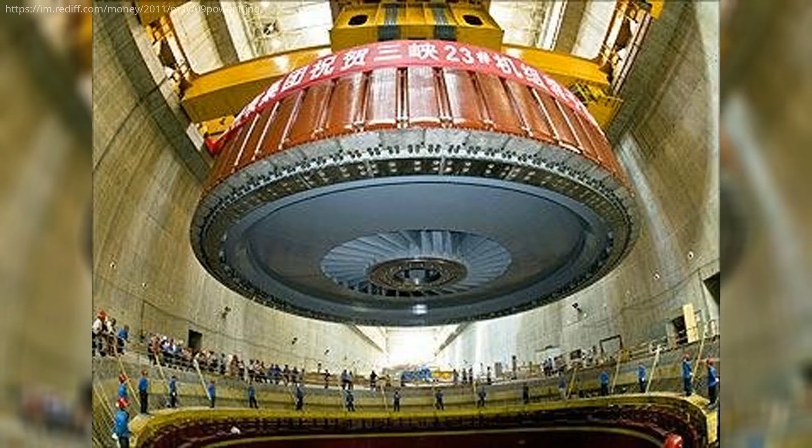It is 8:13 a.m. on August 17, 2009, inside Russia's Sayano Shushenskaya hydroelectric power station. Workers going about their standard morning routine suddenly witness the impossible. A solid steel spinning rotor weighing over 920 tons begins to rise up out of the floor entirely on its own. Before anyone can comprehend the sight or reach the emergency controls, a volcanic eruption of highly pressurized water blasts through the thick concrete. Just listen to the sheer destructive power of a high-pressure breach.

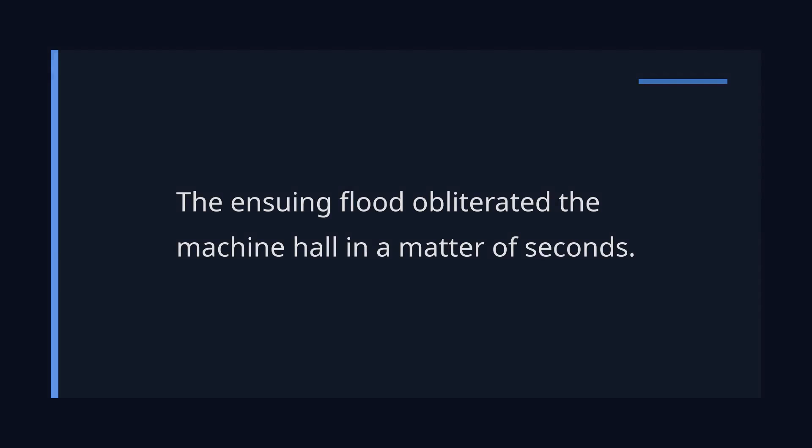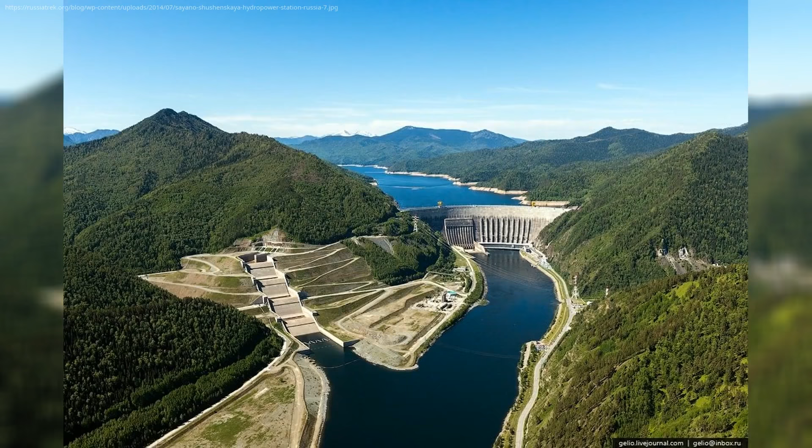The ensuing flood obliterated the machine hall in a matter of seconds. 75 people were killed, 9 out of 10 massive generating units were utterly destroyed, and 6,400 megawatts of electricity vanished instantly from the grid. Yet the most terrifying detail of this catastrophe is what did not happen. The enormous dam did not collapse, and there was no earthquake to rattle the foundation. The complete annihilation of Russia's largest power plant began in absolute secret, triggered by a microscopic flaw hiding deep inside the machine itself.

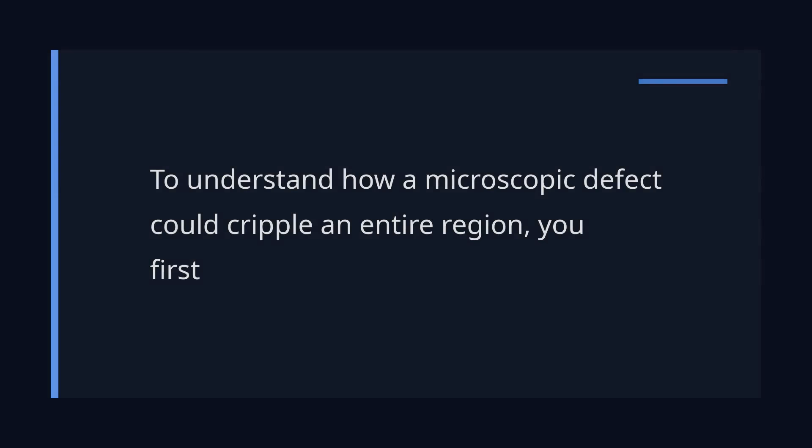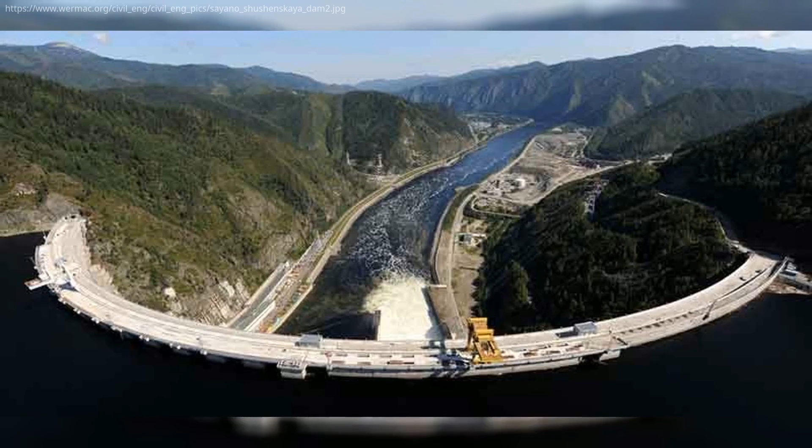To understand how a microscopic defect could cripple an entire region, you first have to grasp the sheer scale of Sayano Shushenskaya. Deep in the remote wilderness of Siberia, the Yenisei River carves a path through the Sayan Mountains. Blocking this massive waterway is a curved arch-gravity dam standing 242 meters tall. That is nearly the height of a 70-story skyscraper, constructed from over 9 million cubic meters of solid concrete. Its crest stretches over 1,000 meters across the river valley.

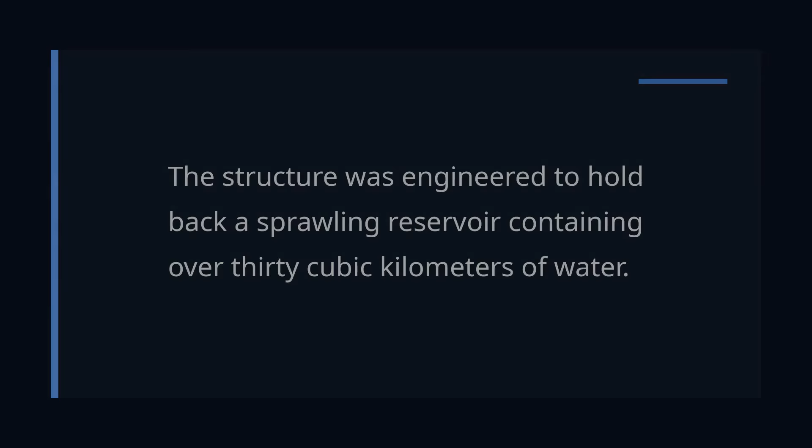The structure was engineered to hold back a sprawling reservoir containing over 30 cubic kilometers of water. When the spillways open to relieve the intense pressure, the raw kinetic energy is staggering. Just listen to the immense roar of the unleashed Siberian River.

Tucked away at the base of this colossal wall was the machine hall. It housed 10 titanic hydro-turbine generating units. When operating at peak efficiency, these machines produced a combined output of 6,400 megawatts. This made Sayano Shushenskaya the undisputed largest hydroelectric power station in Russia and a crown jewel of global engineering. However, this facility was not primarily designed to light up residential neighborhoods or nearby cities. It was built specifically as the beating heart of the Soviet and later Russian industrial machine.

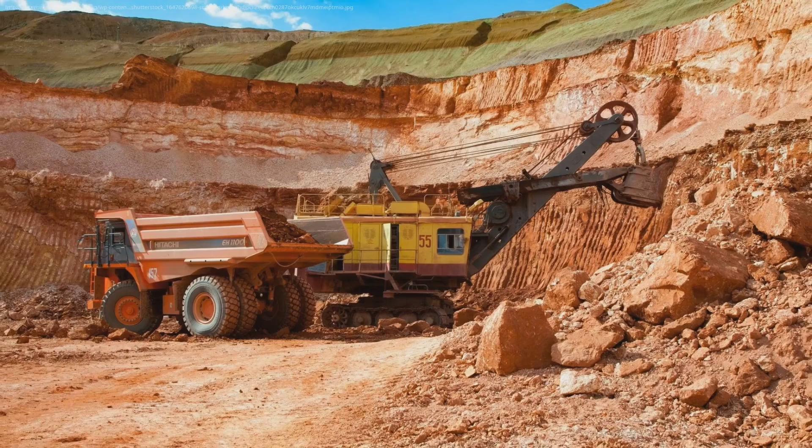The Siberian territory is dominated by massive aluminium smelters. Extracting pure aluminium from raw bauxite ore requires a continuous extreme supply of direct electrical current. The smelting process is so incredibly energy hungry that economists often describe exported aluminium as packaged electricity. Sayano Shushenskaya existed to feed these specific factories. Its turbines ran under constant heavy loads day and night to keep the molten metal flowing.

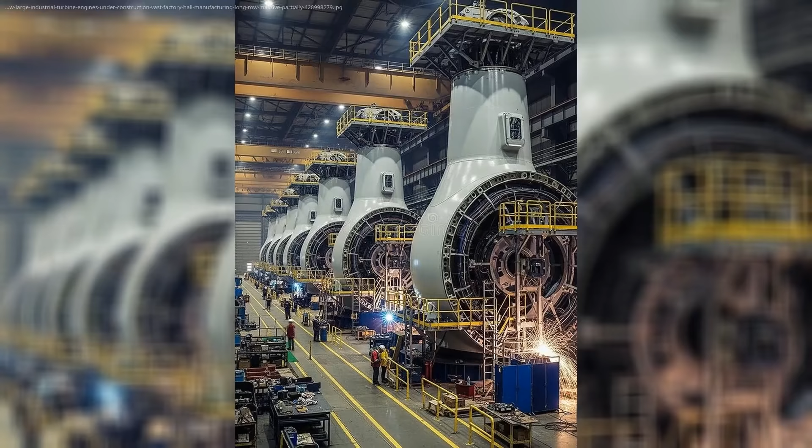Because of this deeply integrated relationship, the dam was an irreplaceable titan of the regional electrical grid. It supplied more than a quarter of the entire power demand for the vast Siberian territory. There were simply no secondary power stations capable of stepping in if this mega dam went offline. It carried the industrial economy on its back, meaning a sudden failure in the machine hall would instantly paralyze supply chains hundreds of miles away.

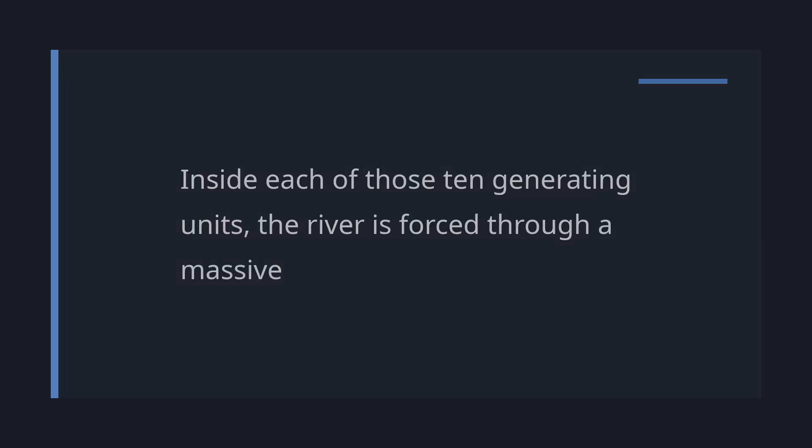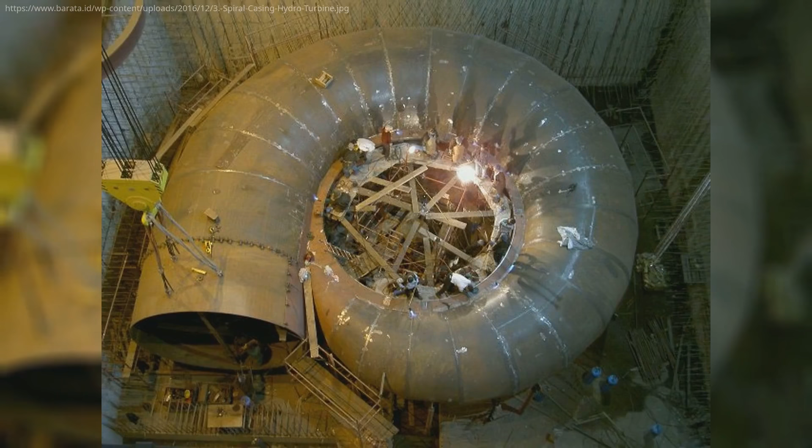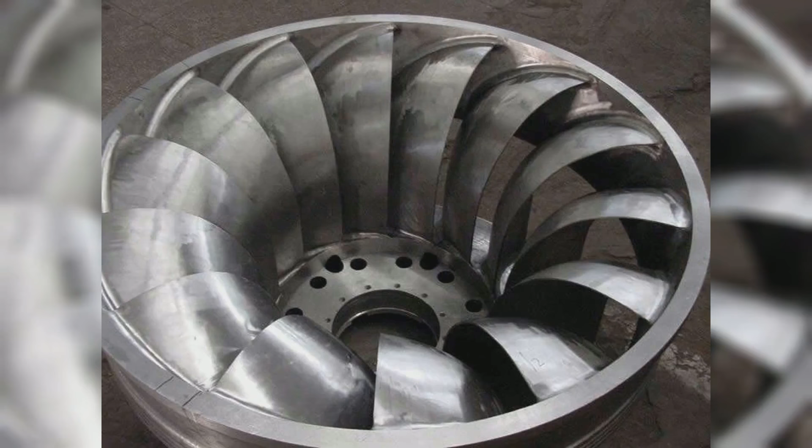Inside each of those 10 generating units, the river is forced through a massive steel pipe called a penstock. Falling from a height of over 200 meters, the water accelerates dramatically before slamming into a precisely engineered spiral casing. This structure acts like a giant snail shell, squeezing the rushing liquid and guiding it into a tight, high-speed vortex. At the very center of this whirlpool sits the turbine runner. This is a massive steel wheel fitted with intricately angled blades. As the vortex tightens, the water strikes these blades, transferring its raw kinetic energy and forcing the runner to spin at exactly 142.8 revolutions per minute.

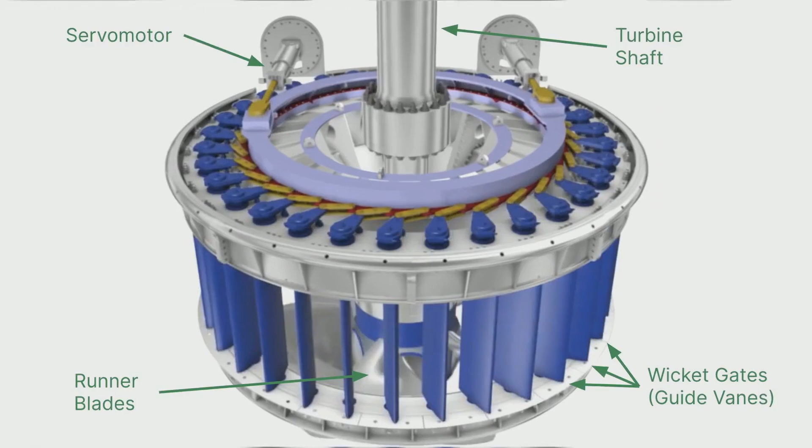Surviving inside this machine requires withstanding extreme, fluctuating, and often chaotic forces. Every single second, over 300 cubic meters of water blast through the turbine casing. That is roughly 300 metric tons of mass tearing through the system in the blink of an eye. This relentless flow creates a violent three-dimensional assault on the machinery. The sheer weight of the descending water pushes heavily downward, while centrifugal forces push violently outward against the metal walls. At the same time, the high-pressure flow rushing underneath the spinning blades creates a massive continuous upward thrust.

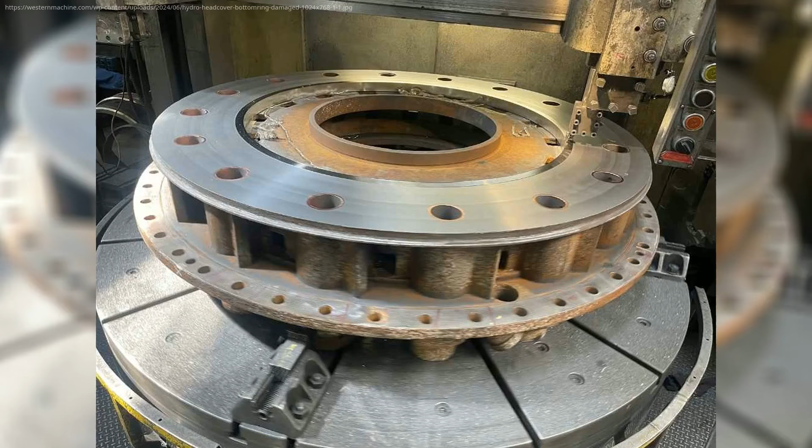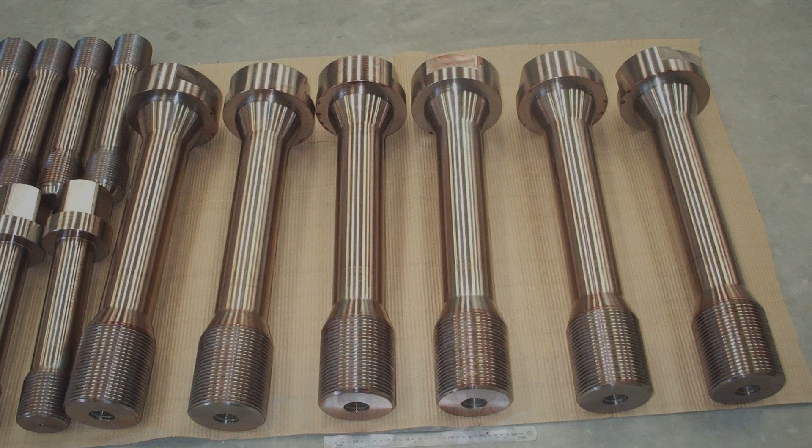To contain this relentless hydromechanical violence, the entire turbine assembly is capped by an enormous heavy steel head cover. You can think of this cover as a massive lid clamped onto an industrial pressure cooker. Keeping this heavy lid sealed tightly against the upward thrust of the river relies entirely on a single ring of 80 steel studs. Each of these threaded fasteners is roughly 8 centimeters thick, secured firmly into the foundation with a heavy-duty nut. These 80 steel fasteners represent the ultimate, non-negotiable line of defense for the entire facility. Below them lies the unyielding, crushing pressure of a sprawling Siberian reservoir desperate to find an exit.

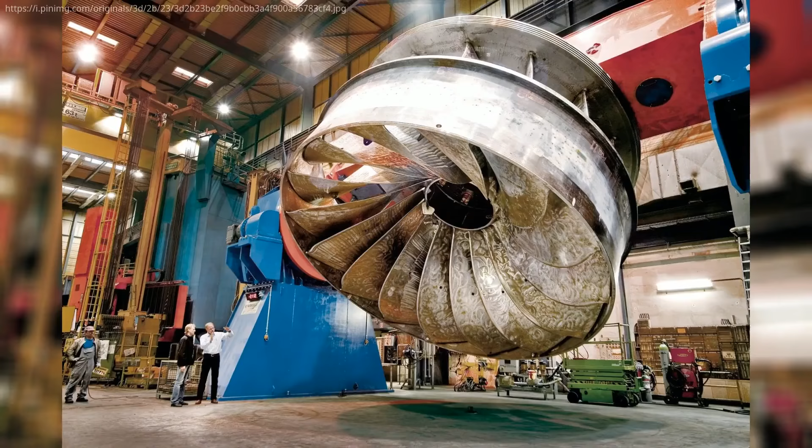Directly above them sits the dry, open floor of the machine hall where dozens of technicians and engineers work their daily shifts. There are no secondary containment domes, no backup seals, and no emergency blast shields. If those 80 specific studs stretch, crack, or shear off, the pressure boundary vanishes. There would be absolutely nothing left to stop the full force of the Yenisei River from bypassing the turbine runner entirely and erupting straight upward into the powerhouse.

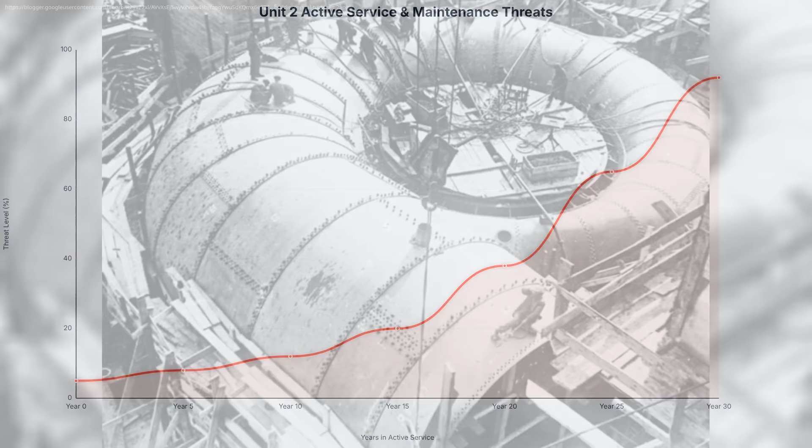Unit 2 had been spinning inside the Sayano Shushenskaya dam for nearly 30 years. But the age of the heavy steel machinery was not the primary problem. The real threat was how the unit was operated and maintained. In early 2009, Unit 2 underwent a scheduled modernization. Over the decades, relentless water pressure and cavitation had slowly carved deep pits into the steel turbine blades.

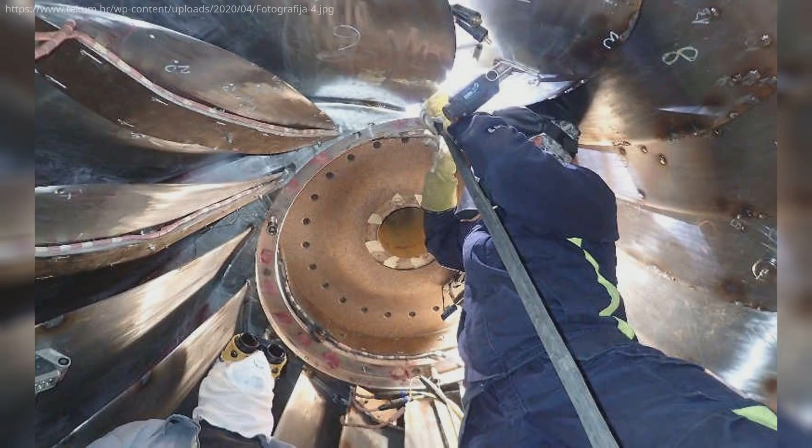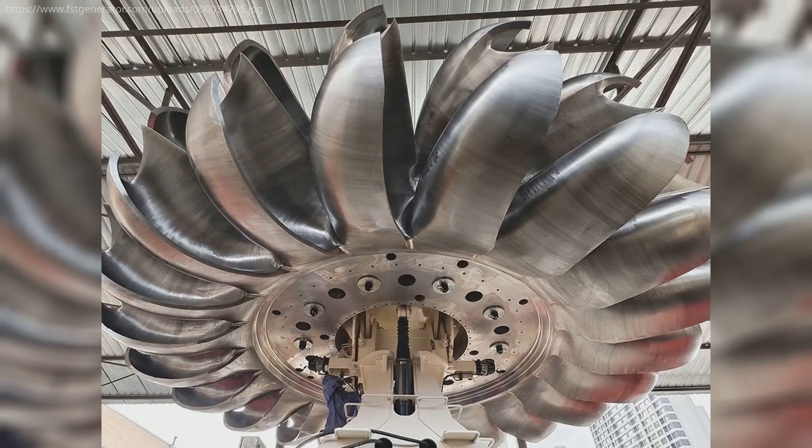Technicians welded these cavities to restore the smooth surfaces, but they made a critical engineering error. After adding asymmetrical amounts of new metal to the blades, they failed to properly rebalance the massive runner. It was exactly like putting a patch on a highway vehicle's tyre without balancing the wheel first, only this involved a rotating mass weighing hundreds of metric tons.

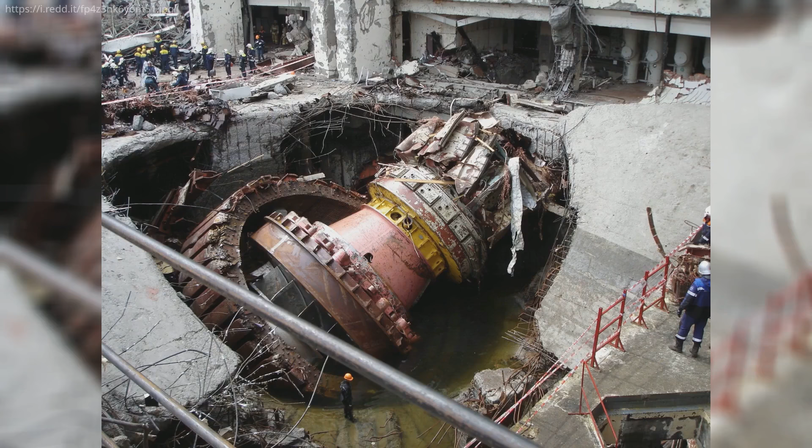When Unit 2 was brought back online, the consequences of this poor maintenance became immediately obvious. The uneven weight distribution caused the entire turbine shaft to wobble. Over the next few months, bearing vibrations steadily increased as the imbalance took its toll. By the summer, the heavy shaft was shifting laterally by 0.84 millimeters.

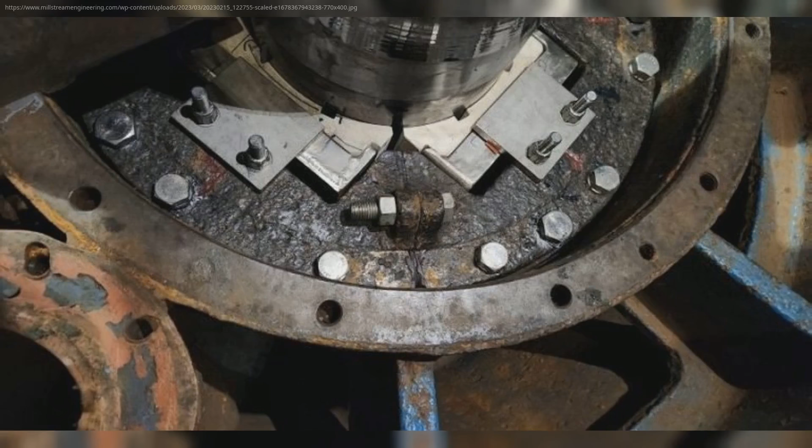While less than a single millimeter might sound microscopic, for a machine of this sheer size spinning at 142.8 revolutions per minute, it was a massive and highly destructive amount of physical movement. Every single rotation forcefully hammered away at the internal guide bearings and surrounding structures.

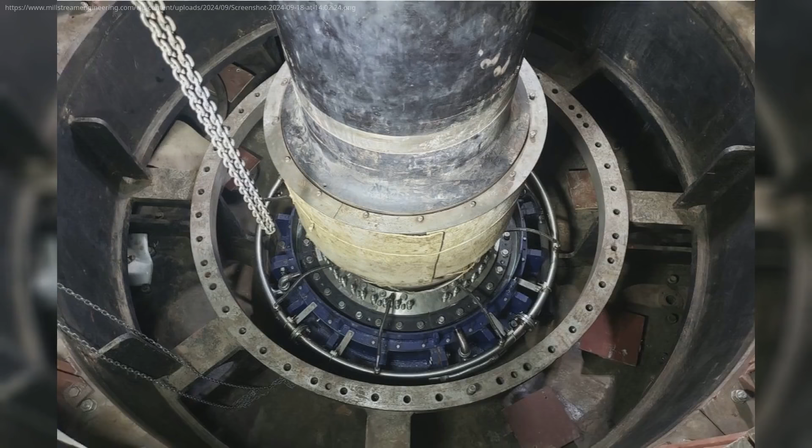Making matters much worse was the fundamentally counterintuitive nature of Francis turbines. You might expect a massive hydroelectric machine to shake the most when pushed to its absolute maximum output, but these specific turbines actually run incredibly smoothly at full power. The true danger lies in an unfavourable intermediate power band.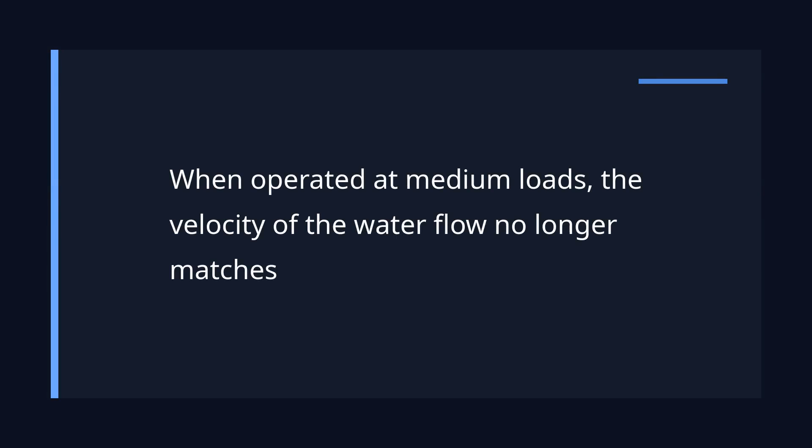When operated at medium loads, the velocity of the water flow no longer matches the fixed angle of the spinning blades. The rushing river physically separates from the steel surfaces, creating violent pressure pulses and chaotic vortexes beneath the runner. For months, grid operators repeatedly forced Unit 2 into this exact unfavourable zone to regulate the regional power supply, drastically compounding the severe vibrations actively tearing at its foundation.

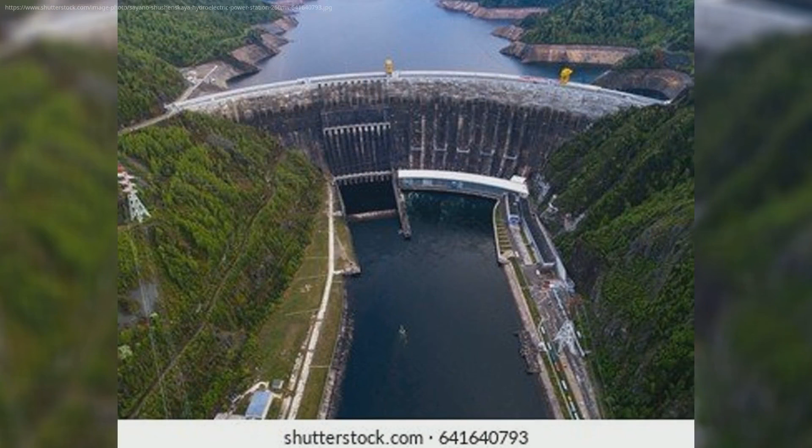To understand why this regulation was so destructive, you have to look at how grid balancing actually works. An electrical grid requires power generation to perfectly match consumer demand at every second of the day. As millions of people turn appliances on and off, power stations must constantly change their electrical output. For a hydroelectric plant, this means continuously adjusting the volume of water flowing through the penstocks, an action that inevitably forces the turbines to pass through their unstable dead zones as they transition between high and low power.

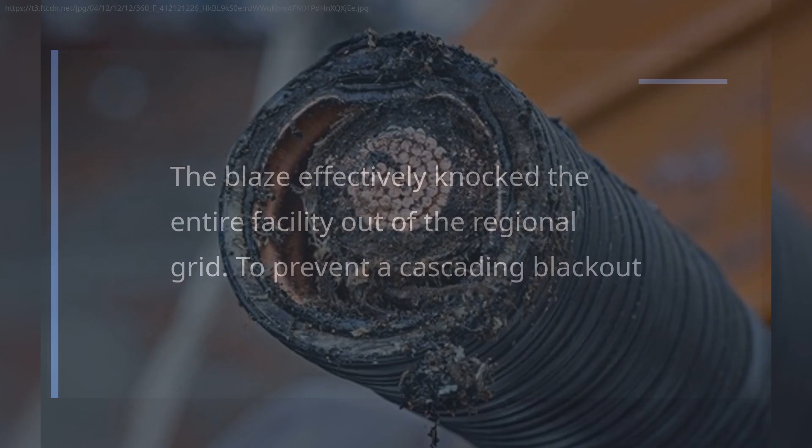This routine wear and tear escalated into a localized crisis on August 16, 2009. A fire broke out at the nearby Bratskaya hydroelectric power station, severing its vital communication and control cables. The blaze effectively knocked the entire facility out of the regional grid. To prevent a cascading blackout across Siberia, Sayano Shushenskaya was immediately ordered to take over Bratskaya's network regulation duties.

The plant's automated control system designated Unit 2 as the primary regulating turbine. Overnight and into the early morning hours of August 17th, the machine's electrical output was aggressively manipulated. As the regional grid demanded more or less power, the system relentlessly chased those rapidly changing requirements. Unit 2's load rose and dropped sharply, over and over again. With every single shift in power, the software dragged Unit 2 straight through its dangerous intermediate power band.

The turbine repeatedly entered its unstable hydraulic range, where rushing water physically separated from the steel blades and created chaotic pressure vortexes. Already crippled by a severely unbalanced rotor and degraded bearings, the heavy machine was subjected to violent pulsing stress, hammering its weakened internal components toward a catastrophic mechanical failure.

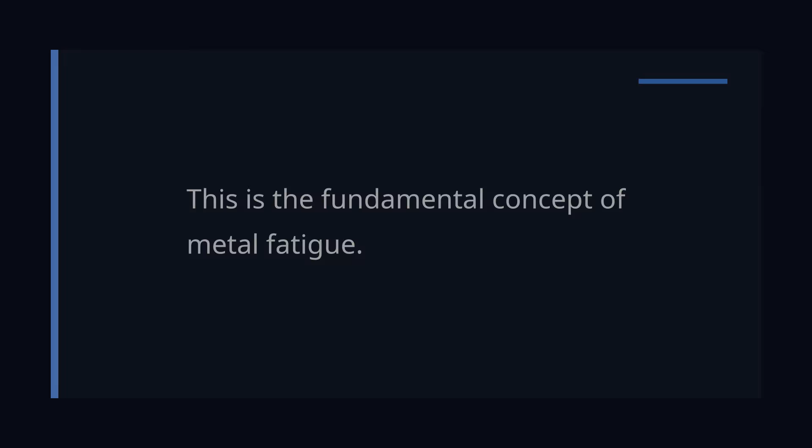If you want to break a metal paperclip, you do not try to pull it apart with one massive tug. Instead, you bend the wire back and forth over and over again until the internal structure degrades and snaps. This is the fundamental concept of metal fatigue. A heavy industrial component will rarely break from a single heavy load.

However, if you subject that same solid metal to millions of smaller, repetitive stresses, the atomic bonds will slowly begin to slip, forming microscopic cracks that grow wider with every cycle. Inside Unit 2, this relentless bending effect was focused directly on the enormous steel studs bolting the turbine cover down to the plant foundation.

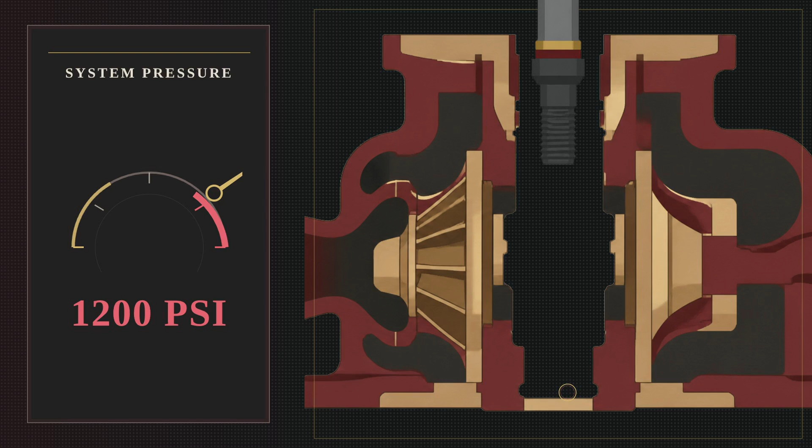These heavy fasteners were tasked with keeping the massive cover locked in place against the immense upward pressure of the river. But every time the control software dragged the turbine through its unstable zone, chaotic water vortexes violently shoved the entire assembly upward, physically stretching the steel studs. When the pressure dropped seconds later, the studs slammed back down. This continuous loading and unloading cycle was heavily amplified by the extreme vibrations radiating from the unbalanced rotor.

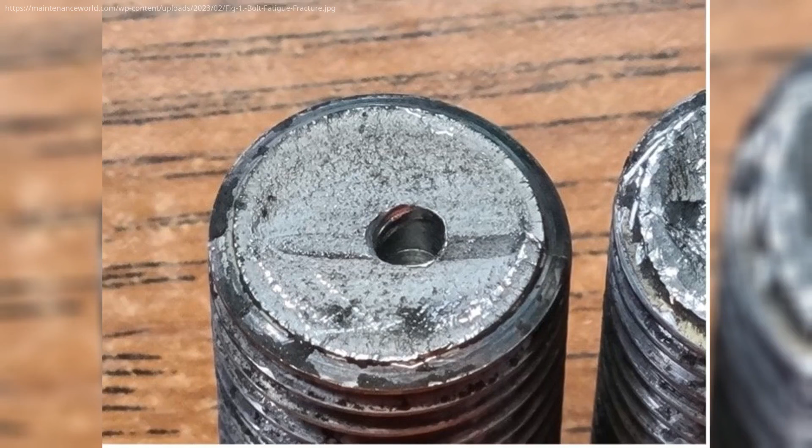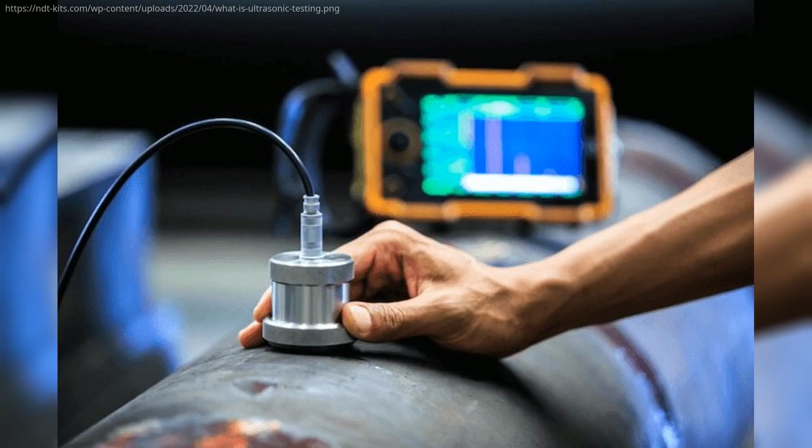The horrifying scale of this microscopic death was only revealed during the post-disaster investigation. When forensic engineers examined the ruined turbine pit, they recovered 49 of the heavy steel studs that had originally secured Unit 2. The laboratory results were staggering. 41 of those recovered studs showed clear evidence of extensive fatigue cracking. Even more terrifying, the cross-sectional integrity of 8 specific studs was 90% compromised long before the morning of August 17th. Only a tiny fraction of solid metal remained intact in the center of those critical bolts.

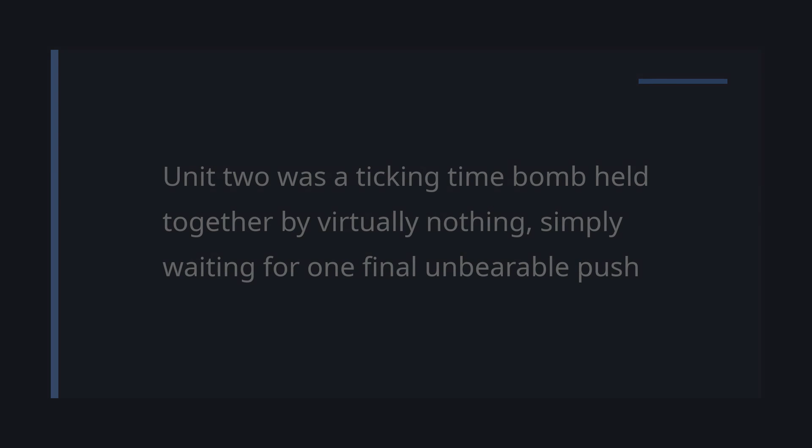The primary mechanical fasteners holding the heavy turbine against the crushing force of the water were essentially destroyed before the final crisis even began. Years of invisible fatigue had silently eaten through the solid steel. Unit 2 was a ticking time bomb, held together by virtually nothing, simply waiting for one final, unbearable push to tear itself right out of the concrete floor.

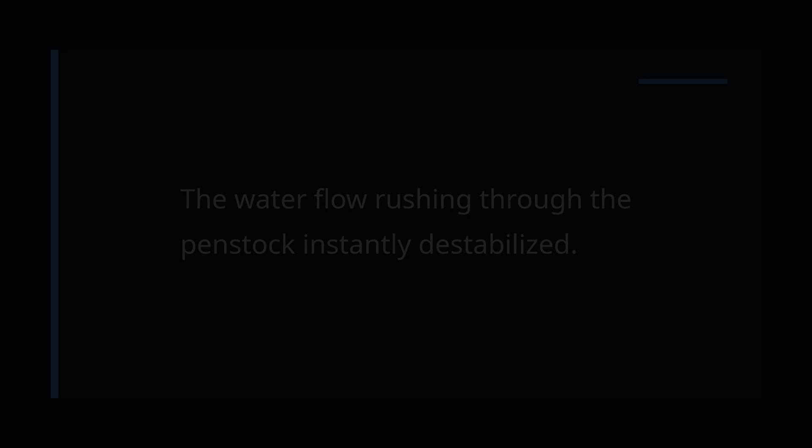At exactly 8:12 a.m., the automated turbine regulator made a routine adjustment. Sensing a minor shift in power grid demand, the computer reduced the output of Unit 2. This seemingly normal command dropped the massive machine directly back into the highly unstable intermediate power band, and the water flow rushing through the penstock instantly destabilized. Chaotic hydraulic vortexes formed underneath the turbine runner, slamming upward against the assembly with immense pulsating force.

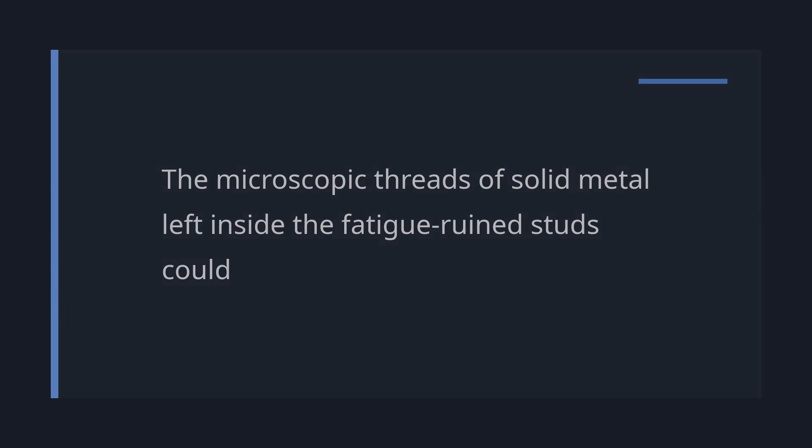The microscopic threads of solid metal left inside the fatigue-ruined studs could not absorb this final violent blow. All remaining weakened bolts snapped simultaneously, severing the only mechanical connection keeping the turbine anchored to the concrete foundation. With the fasteners completely destroyed, there was absolutely nothing left to hold back the crushing weight of the river. Nearly 20 bar of highly pressurized water slammed upward against the underside of the steel turbine cover.

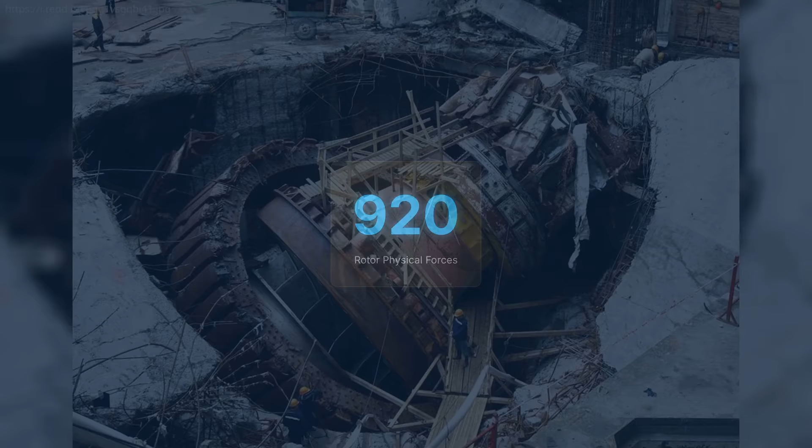The unfathomable hydraulic force ripped the entire 920-ton spinning rotor completely out of its housing. The massive rotating steel structure violently tore through the surrounding equipment and launched 3 meters straight up into the air, instantly severing its heavy electrical connections. The immediate physical destruction of the generator floor was absolute.

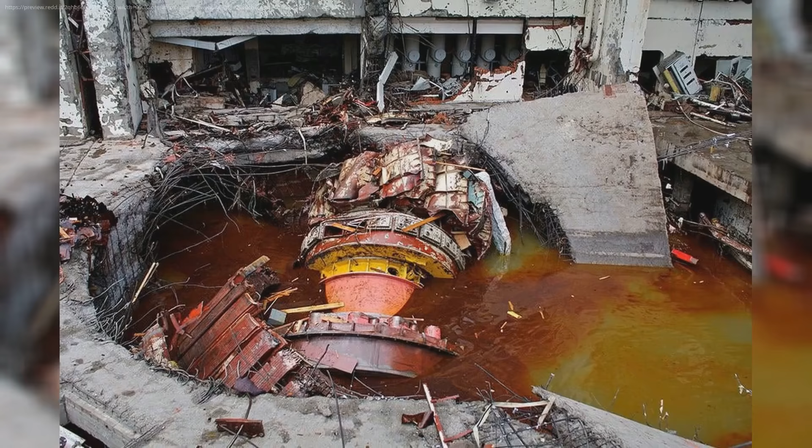The enormous corrugated steel cover was blown completely out of its seat, flipping over and landing vertically on the floor of the plant. The heavy reinforced concrete foundation surrounding the turbine pit shattered under the extreme stress, firing jagged chunks of stone shrapnel across the room. Essential plant equipment, steel catwalks and control cabinets were pulverized in a fraction of a second.

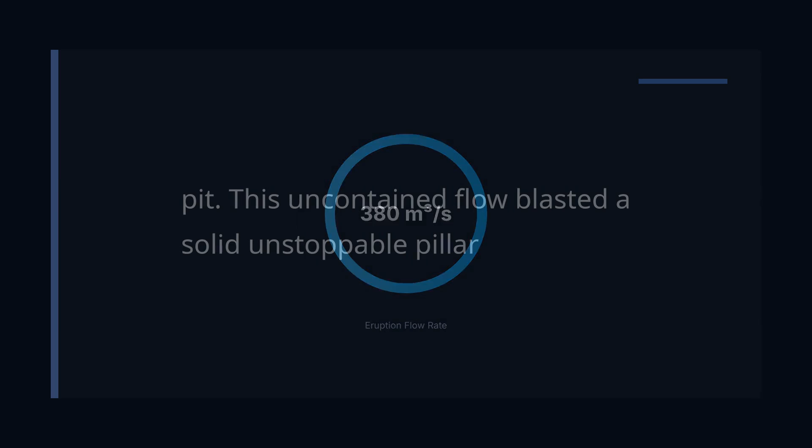With the spinning rotor ejected from its casing and the heavy seal entirely gone, the main penstock became a wide open pipe pointing directly up into the building. 380 cubic meters of water per second erupted from the ruined empty pit. This uncontained flow blasted a solid, unstoppable pillar of the river directly into the main turbine hall, immediately threatening everything and everyone inside the structure.

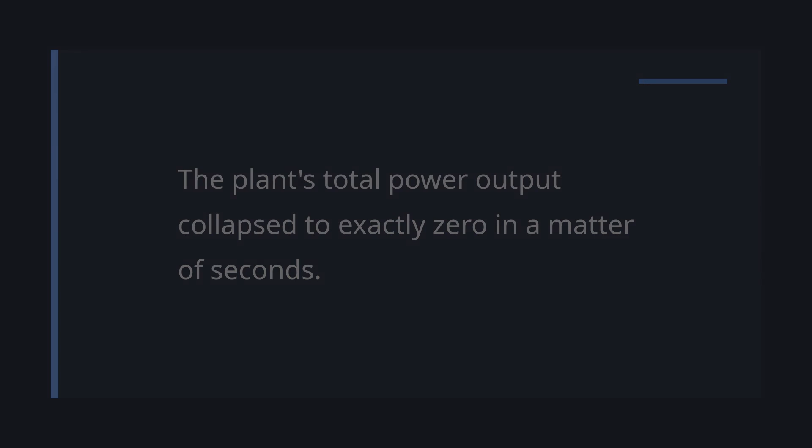The explosive geyser of water rocketing out of Unit 2 immediately slammed into the surrounding high-voltage electrical infrastructure. Violent arcs of electricity illuminated the massive turbine hall as the systems short-circuited under the deluge. The plant's total power output collapsed to exactly zero in a matter of seconds. With the main transmission lines severed and local power failing, the entire building was instantly plunged into absolute darkness, leaving only the deafening roar of rushing water.

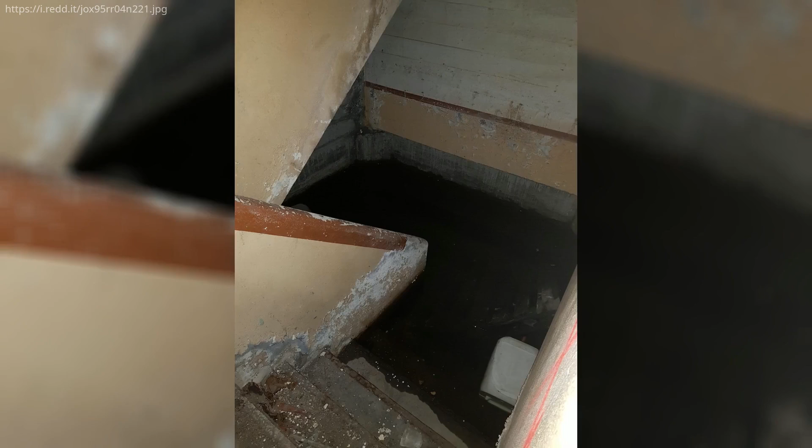For the maintenance crews and engineers working on the lower levels beneath the generator floor, there was absolutely zero time to react. Freezing river water flooded the subterranean galleries and catwalks at terrifying speed. The furious current battered against metal doors and swept down the narrow corridors. In pitch-black conditions, workers scrambled to find stairwells and exits, but the sheer volume pouring from the open penstock meant the water level rose faster than anyone could climb. Many were trapped deep inside the submerged concrete labyrinth with no possible route of escape.

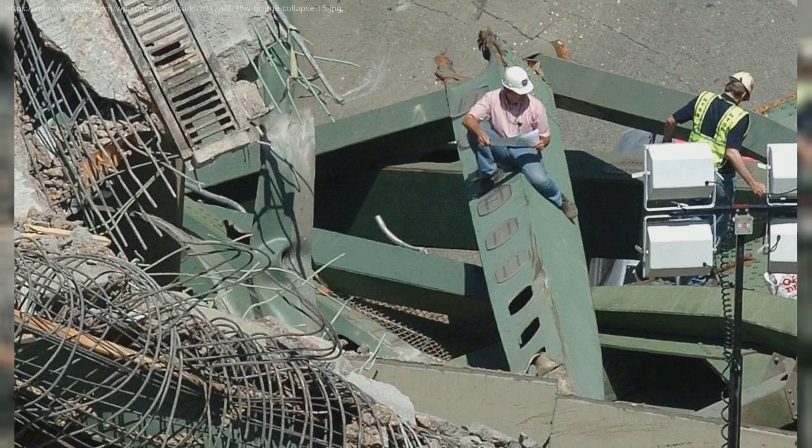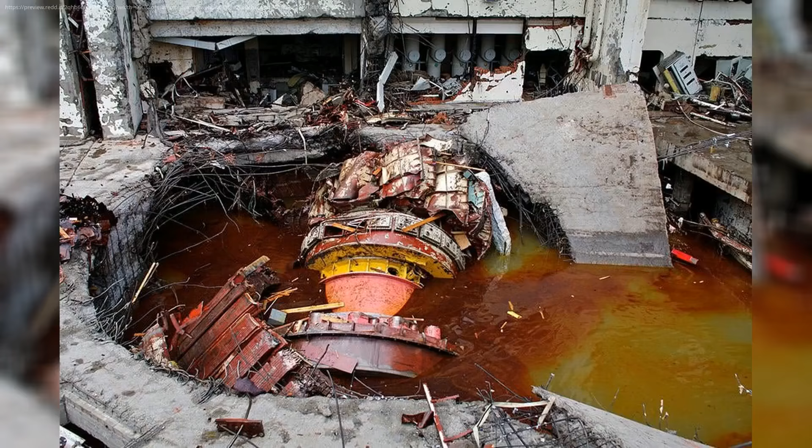Above them, the catastrophic failure cascaded through the physical structure of the powerhouse. The immense hydraulic pressure and the initial shock wave from the flying 920-ton rotor severely compromised the building's steel framework. Sections of the massive roof above the turbine hall buckled and tore apart. Hundreds of tons of structural steel and metal roofing collapsed downward, violently crashing into the neighbouring machines. Generating units 7 and 9 were directly underneath the falling debris and were completely destroyed by the massive impact. Within just a few chaotic minutes, the destruction was nearly absolute.

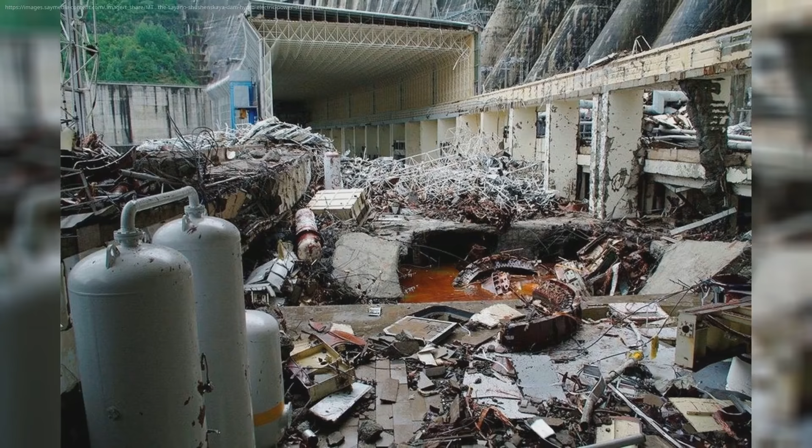The relentless floodwaters and falling wreckage took a devastating human toll. 75 workers were killed, either drowned in the rapidly flooding lower levels or crushed by the collapsing roof and flying concrete shrapnel. Of the 10 massive generating units that made up Russia's largest hydroelectric plant, 9 were either severely flooded or entirely annihilated. The station had gone from full operational capacity to total catastrophic failure in the blink of an eye.

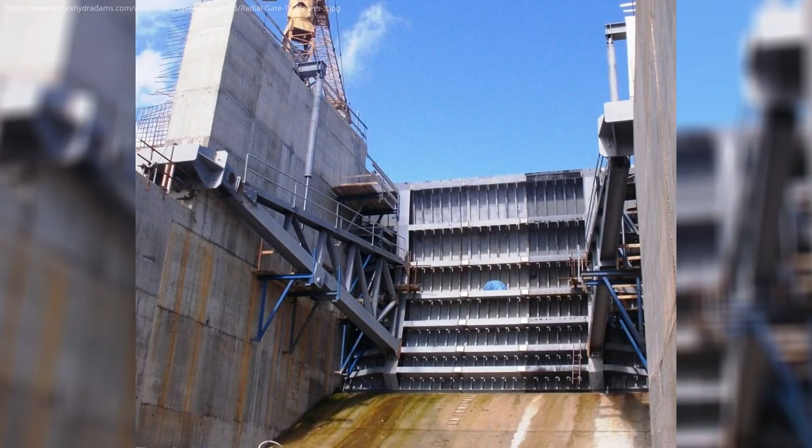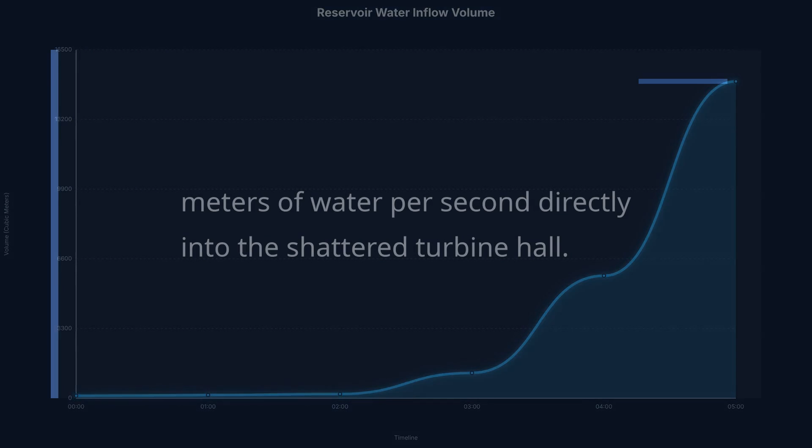The total blackout created a terrifying new reality for the survivors. Without electricity, the automated safety systems were completely dead, meaning the massive intake gates at the top of the dam could not close on their own. Unit 2's penstock had become nothing more than an open pipe. The immense pressure of the reservoir was blasting thousands of cubic meters of water per second directly into the shattered turbine hall.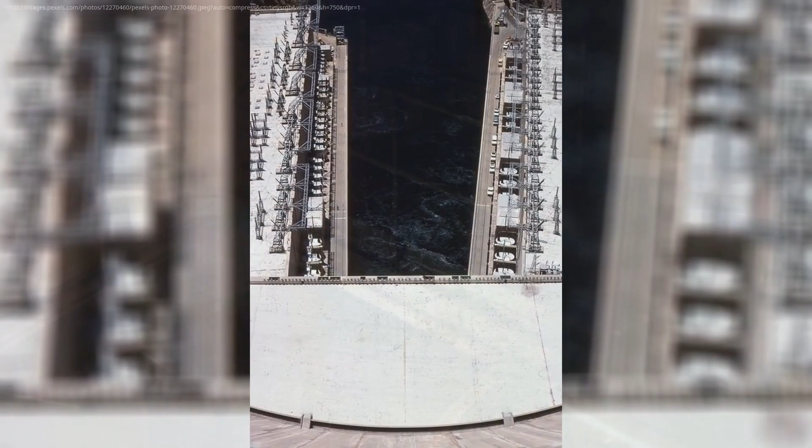This relentless flow was not just flooding the destroyed building, it was actively threatening to undermine the foundation of the concrete structure. A small group of plant workers realized they had to act immediately before the damage spread to the dam itself. They raced up to the crest of the dam, navigating through pitch-black corridors and climbing endless stairwells to reach the absolute highest elevation. At the top, the intake gates were locked in the open position by heavy hydraulic jacks. Because there was zero power to run the motors, the men had to operate the emergency controls entirely by hand.

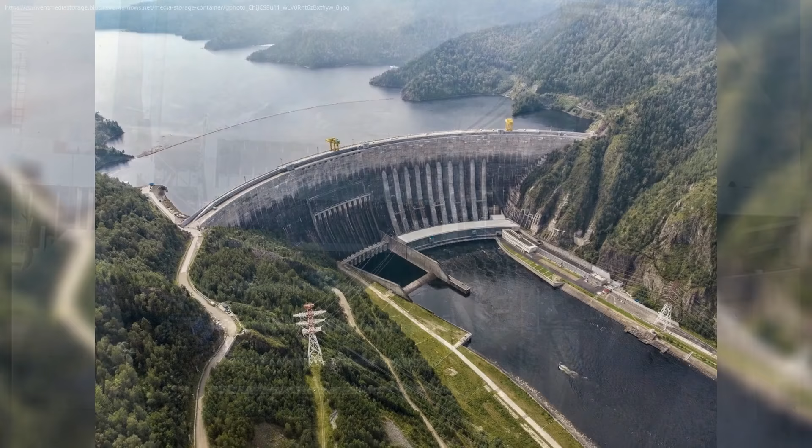They smashed open the heavy control cabinets and began manually opening the bypass valves, physically bleeding the pressurized oil out of the hydraulic cylinders. Inch by inch, gravity slowly took over. The 150-ton steel emergency gates began to slide down their vertical tracks. The workers had to repeat this exhausting manual process across the intake structures, muscling the valves open in complete darkness while the river continued to roar through the open penstocks beneath them. It took nearly a full hour of desperate back-breaking labour to finally drop the last gate and fully shut off the flow of water into the powerhouse.

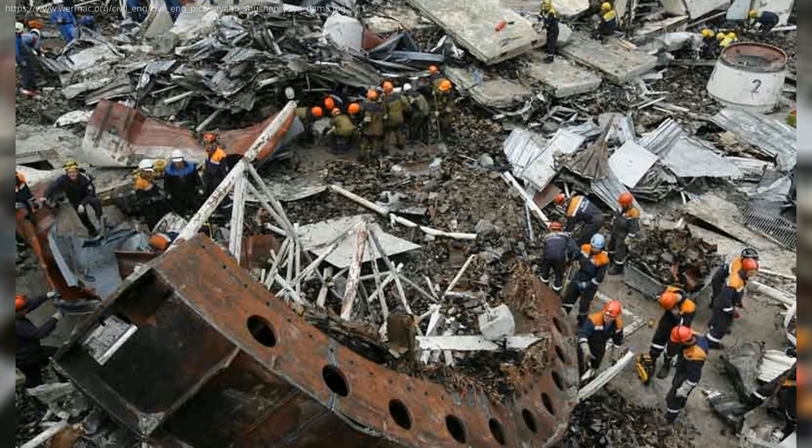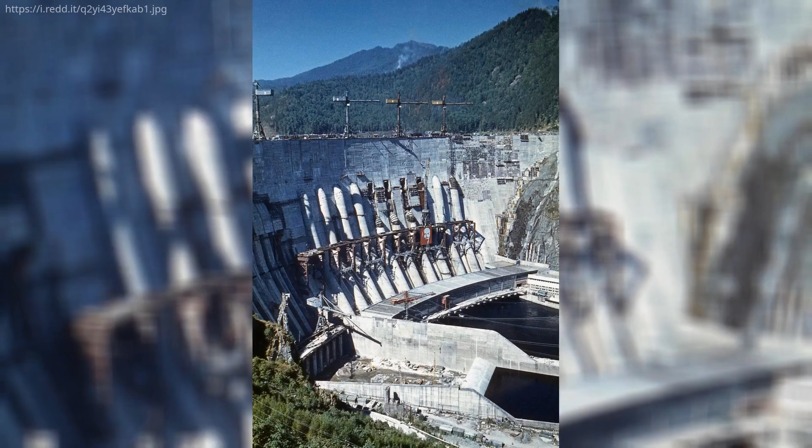This heroic manual intervention severed the connection between the towering reservoir and the open generators below. By stopping the deluge, this handful of workers successfully contained the destruction to the turbine hall. Most importantly, they prevented the incredibly powerful currents from eroding the dam's primary structural supports, averting the unimaginable nightmare of a total dam collapse that would have swept away entire populations downstream.

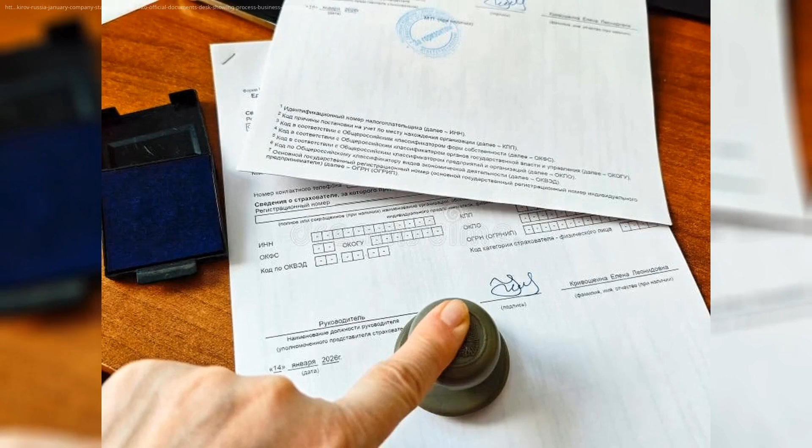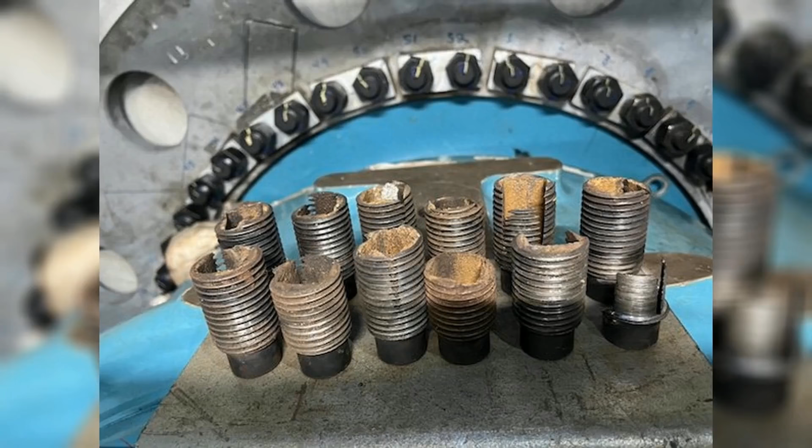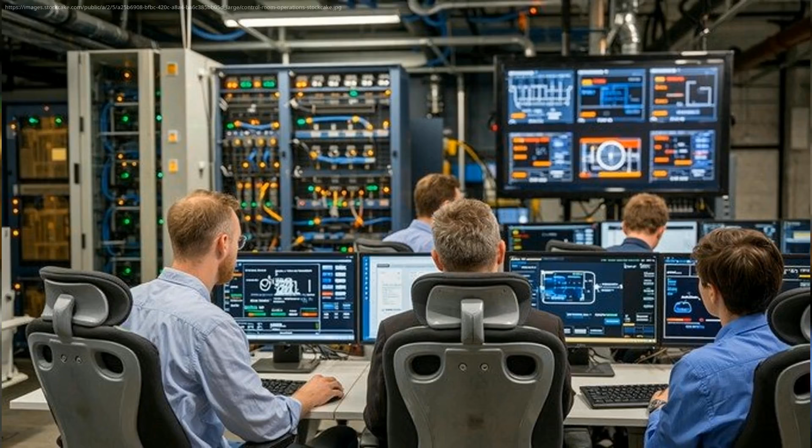In October 2009, the Russian government released the official investigation report. The findings blamed a devastating combination of poor maintenance, actively ignored vibration data, and severely fatigued turbine cover studs. Months of continuous rough running had weakened the thick steel bolts holding the 920-ton assembly down, destroying their structural integrity. Engineers and physicists immediately began debating what actually delivered the final upward strike that severed those compromised bolts. The leading theory points to a hydraulic shock wave known as a water hammer.

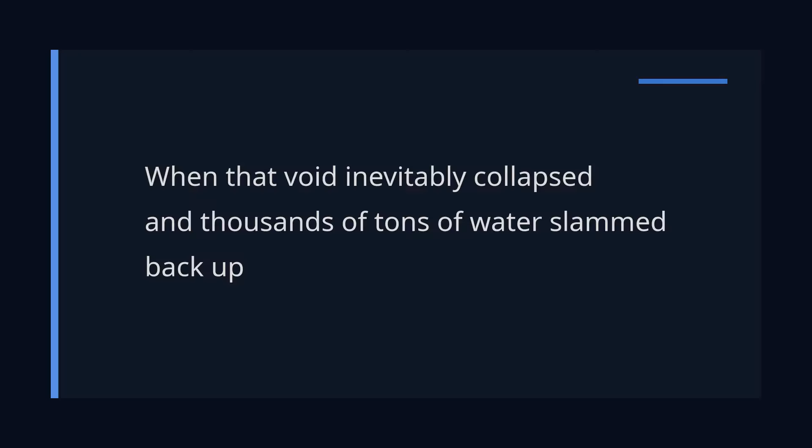When Unit 2 was ordered to drop its power output, the automated control system rapidly closed the guide vanes to choke the flow of water into the turbine. This sudden restriction caused a drastic pressure drop, forcing the fast-moving column of water in the draft tube below to physically detach from the bottom of the runner. This separation created an enormous vacuum cavity. When that void inevitably collapsed and thousands of tons of water slammed back up against the spinning turbine, it generated an instantaneous pressure wave. Experts continue to argue over the precise hydraulic mechanics of that final split second.

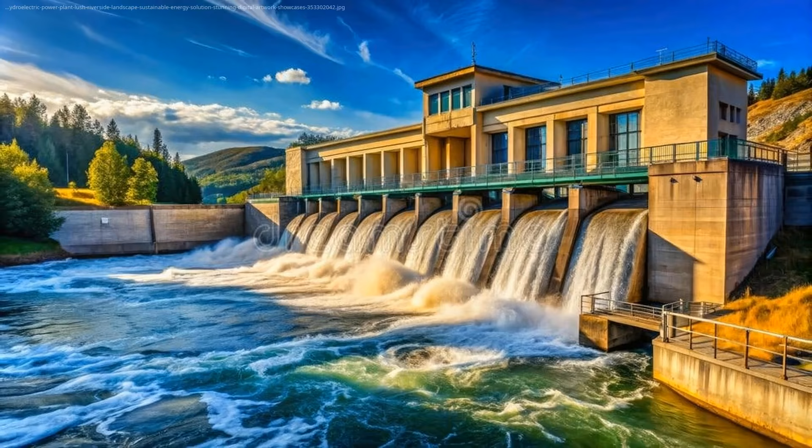Some investigators suggest an extreme vortex rope or severe cavitation provided the ultimate upward force, rather than a full water column separation. But the specific physics of the breaking point do not change the ultimate conclusion of the root cause. Industrial disasters rarely happen from one clean, unpredictable mechanical break. Unit 2 did not tear itself out of the foundation simply because of a sudden water hammer. It was destroyed because human operators repeatedly forced a structurally crippled machine to run inside an inherently unstable power band.

The disaster was entirely preventable, set in motion long before the final hydraulic strike launched the massive rotor through the turbine hall roof. It took years to rebuild Sayano-Shushenskaya, eventually restoring its 6,400 megawatt capacity. But the lasting lesson goes beyond engineering. Monitoring equipment is entirely useless if humans lack the authority or willingness to act on the data before a failure becomes visually undeniable. The chilling realization is that this catastrophe did not begin when the 920-ton rotor tore free. It began while the machine was still producing power, quietly sitting one fatigue cycle away from death.